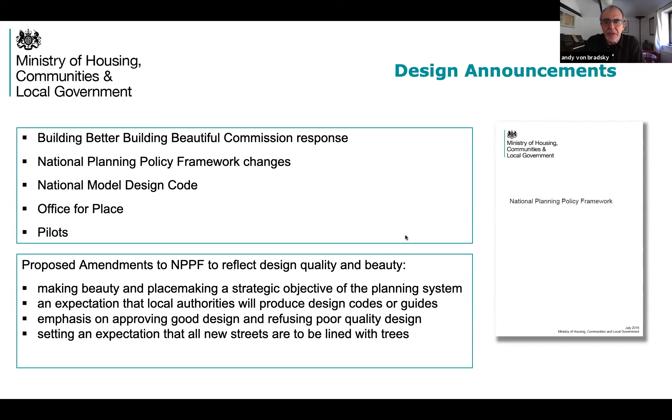So these are the documents that have been issued: firstly, a National Model Design Code, which we'll talk about, and in addition, the design guidance notes that go along with that.

I have to say, a fantastic collaboration with URBED and with Tibbalds on all of the products that we've now produced in government. It has been very iterative. We've talked across government departments and involved stakeholders right across the sector. So this is almost like a co-production as opposed to something we've just outsourced and expected external consultants to deliver. We had quite a considerable amount of overview and response to the consultation.

Design Council helped with that. We talked internally with PINS, with DEFRA, with DFT, BEIS, DFE, and the Home Office, so real engagement with other government departments. And as a consequence, we also talked to Natural England, Historic England, and the Highways England organisations. So some real interactions there.

So this is the suite of documents that now exists, and I think it's important to emphasise that this is not just about the National Model Design Code, although that's clearly a very important set of documents. It's about how all these documents read together. The work that Jane did on the National Design Guide is an anchor for the code and for the guidance notes, and I'll come on to talk about that in more detail. But it is now quite a significant suite of documents that can be referred to in planning decision making.

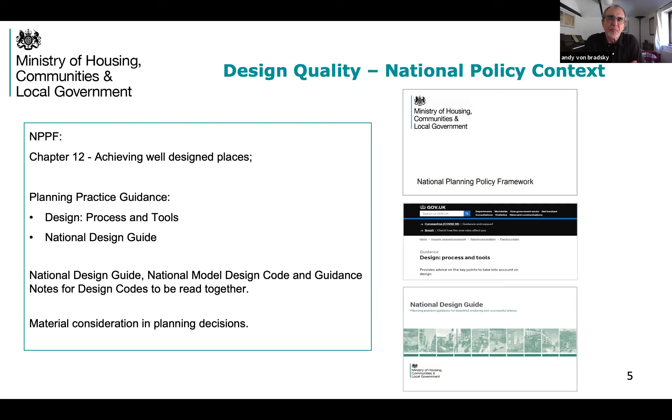Just going back on that point about interactions with other government departments, we took the opportunity here to try and embrace all of the guidance that is emerging or is being worked on or is out there, to make sure that the guidance notes pick up on relevant government initiatives.

You will know that Manual for Streets is being updated, commissioned for WSP, and they're currently working on that. I'm sure many of the members will be engaged in some of the workshops. I'd urge you to engage with that particular piece of work.

The Environment Bill and all its implications becomes quite a steer on the guidance notes, and green infrastructure standards, which I think will emerge in the months ahead, have also been incorporated in our thinking. And of course, climate change as far as we are able to go, and even to the extent of putting in a reference to modern methods of construction and how coding can actually help support that particular initiative.

So what is the code all about? We don't need to dwell too long on this because you will know very well how design guides and design codes differ, and how design codes can be used. And there's a whole raft of learning from overseas that we've gone through in deciding how to adapt that learning to our own circumstances.

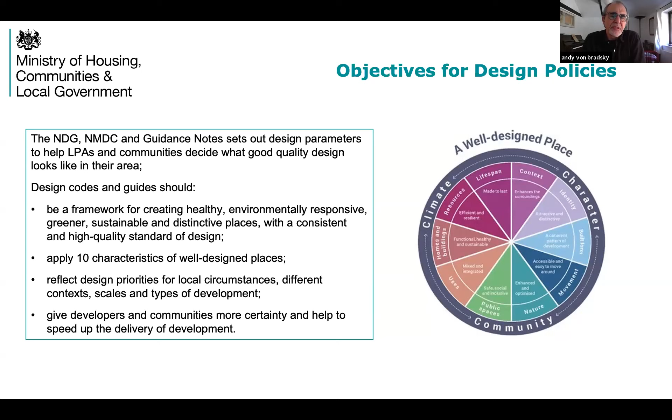Going back to the point about community engagement, a really important aspect from a government point of view is how do we bring democracy forward, a bit of a catchphrase at the moment, but a genuine attempt to get community engagement up front in local decision making on what is included in plans.

One of the key challenges is how do we measure support for design codes that then get embedded in the planning system. Not all the answers are there yet. We need to test that, and I'll come back to the piloting at the end to demonstrate that we are listening to how more community engagement might influence and shape local design codes.

And just finally from me, segueing into what David will talk about, the document isn't a code, it is a process. It needs to be applied flexibly according to local circumstances, and it needs to be informed by local vision, local understanding of the context in which you're operating. It could be ambitiously at county level, or at local authority level, and we'll talk about area.

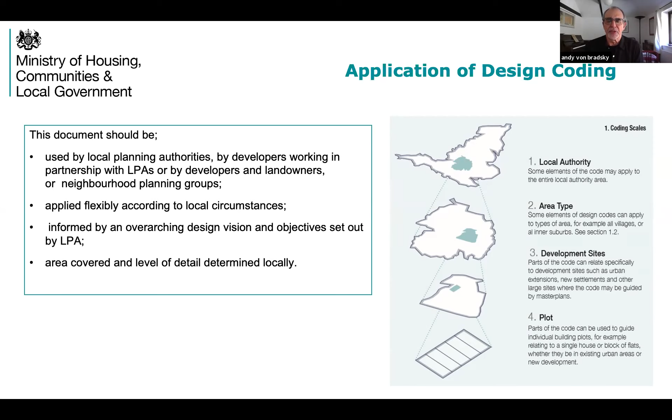Anyway, I want to just take you briefly through the process that's in the code. The guidance notes are far too big to really do credit to in the time we've got available, but the process is the thing that's innovative about the coding we've done. It's in 3 broad steps, broken down into 7 sub-steps, and I'll use my time to take you through those and how local authorities are likely to undertake the coding process.

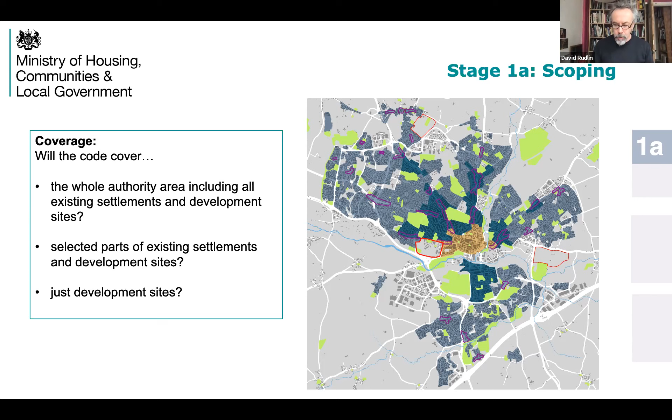So step 1 is analysis. The first part is a decision about the coverage of the code. Local authorities may wish codes to cover their entire area, but that's certainly not a requirement. It may well be they just decide to have codes for their new sites, the allocations, or for both new sites and some parts of their area. I suspect it'll focus on areas where change is likely. So the first question is how much of your district you wish the code to cover.

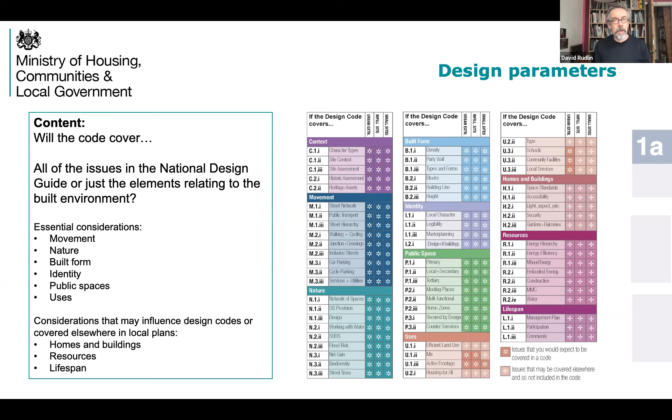The second question is what subject matter you wish it to cover. We expect most codes will cover movement, nature, built form, identity, public space and use. There are other issues we talk about in the code, particularly things like homes and buildings, quality standards, sustainability and management, which may not be in your code. That doesn't mean they're not important, it may well be they're included elsewhere in your policy agenda and not necessarily within the code. So deciding on what it covers.

The other part of stage 1A is, as Andy said, working out your consultation strategy. And importantly, potentially doing training for community groups so that you actually introduce them to the process of coding, so they know what to expect and how they can get involved.

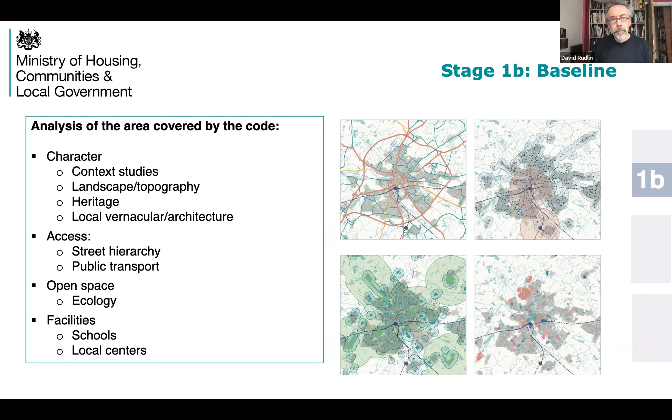The next part of the analysis, stage 1B, is looking at the analysis of the wider area. Most authorities can do this from their existing GIS systems, but things like the street hierarchy are crucial, as I'll come back to in a moment, in terms of how the code applies, but also where the schools are, the public transport, the open spaces, and so on.

We then move on to the vision, and as Andy said, the key thing that we've introduced in this process is what we call an area type.

Elsewhere it might be called a character area or a typology. Area type was the term we derived upon, which is unique to this particular document. Now these are areas of relatively homogeneous character, but the point about the area type and the design vision for it is that we're not so interested in what the character of it is now. We're more interested in the character as we wish it to be in the future.

So, for example, if you've got a suburban area that your local plan is seeking to intensify, the code would reflect that intensification. It would reflect the parameters of the area once it has been intensified. And the area types, therefore, are used to derive a set of guidance and rules, which then are area specific in terms of how they're applied.

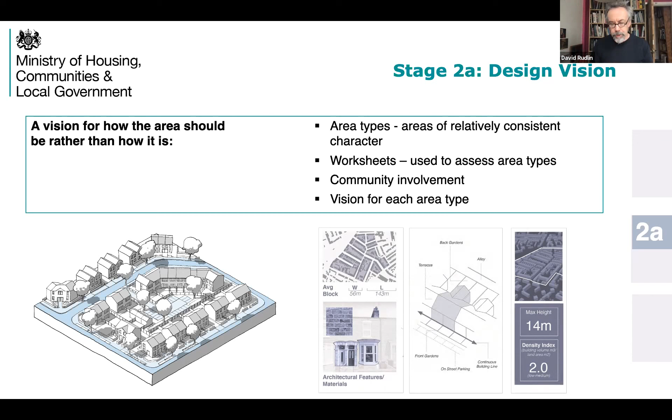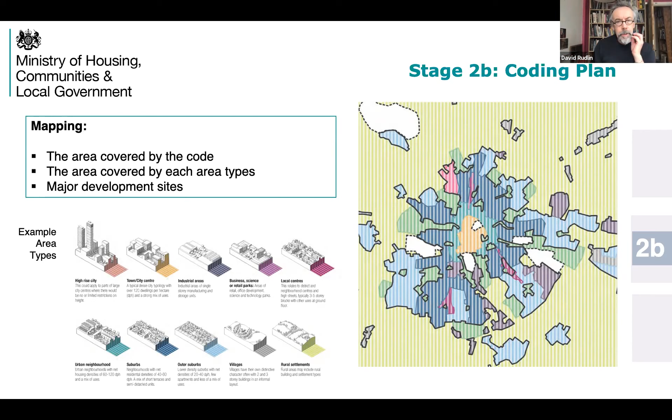Now, in order to code for these sites, you need to have a framework on which to hang the code. So stage 2C is the master planning stage. For each of these development sites, there will need to be a framework master plan, which at the very least shows the high streets and secondary streets, local centres, open space, and the area types. This is something which may be done by the landowner or the developer. That's perfectly fine, and then would be adopted by the local authority. It may be done in partnership, or it may be done by the local authority on sites where there isn't an active plan being developed. But clearly you need a plan which allows you then to apply the code to the sites.

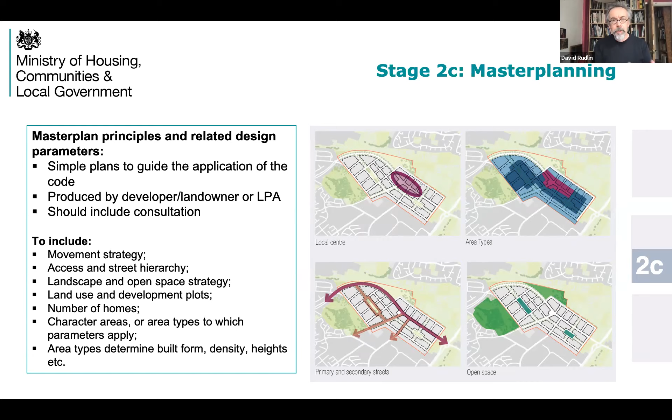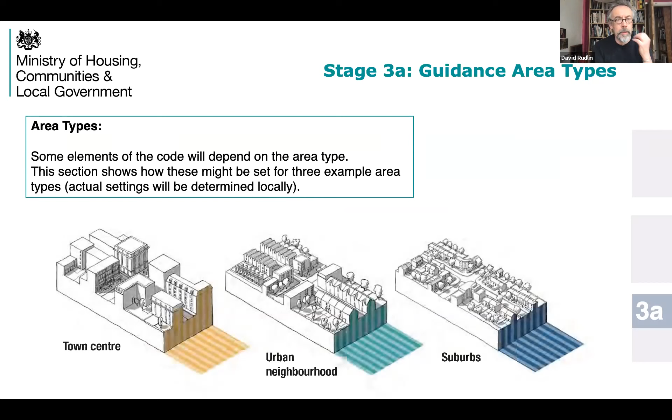So we can come to step 3, which is the code itself. And this is in 2 parts. The first part are the elements that apply to the area types. So about half of the code in total varies by area type. Things like building line, building height, active frontage, and so on. These are things which differ for different area types. In the guidance, we use 3 examples, again not intended to be exclusive: the town centre, the urban neighbourhood, and the suburb. We show in the guidance how the rules and guidance may differ by those area types.

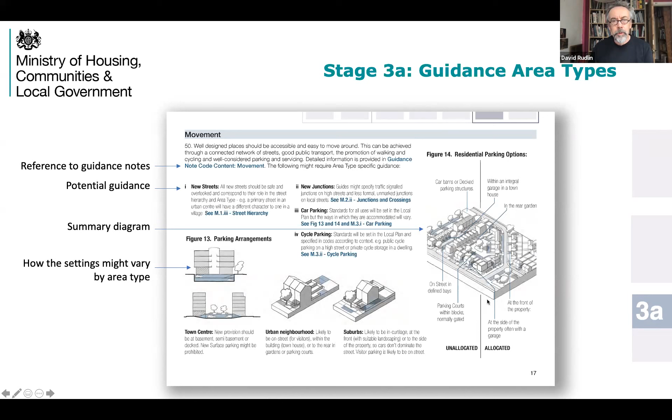So this is a typical page. You've got a paragraph at the top which summarises the issue. In the middle, you've then got a set of suggested policies that you might include in your code, each with a reference in blue, which refers to the guidance notes. And at the bottom, you've then got 3 illustrations showing town centre, urban neighbourhood, and suburb, and how you may apply those. Each has got a drawing, and we're thinking that local codes may just use these drawings if they wish to as well. And then there's a summary drawing, which then shows what happens when you pull all those issues together. So that's how the thing is structured.

We have a section on identity. It's something which is being keenly anticipated in certain parts of the built environment profession, to see how we've dealt with the issue of architectural character and design. We've done this in such a way that it's architecturally neutral. It doesn't indicate contemporary or traditional architecture at all. It's just about the principles of good building design, and working closely with Andy, we've tried to make this of the basic design principles of buildings which could apply to any type of architecture, and we do that for smaller buildings, but also for tall buildings as well.

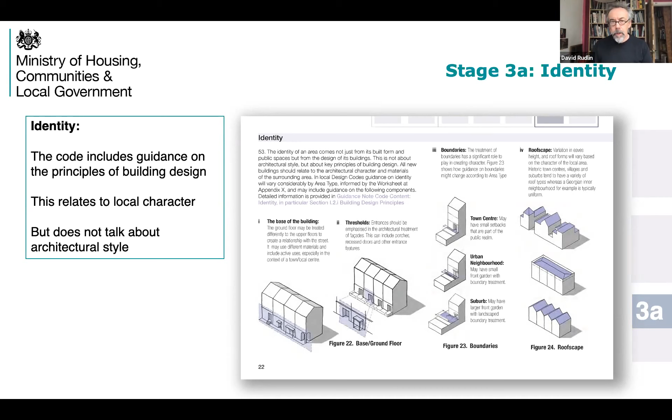Again, one of the issues we had with the code was not being able to be very specific on policies, because we're dealing with the whole country, and clearly there's huge variation in local circumstances. But we did want to put some examples of the way that coding would be specific. So these are some examples of specific coding.

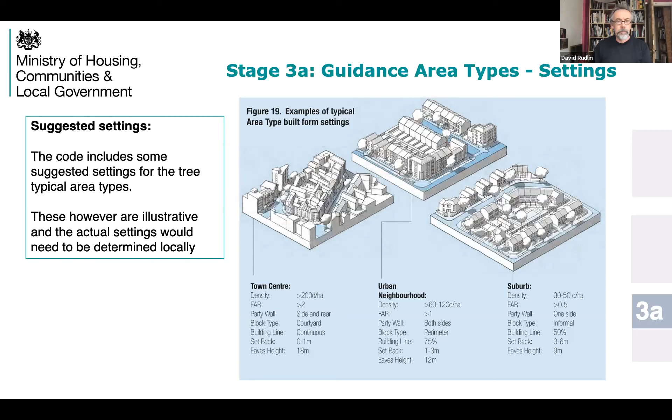So, figures for the density, for the floor area ratio, for the way that you code for party walls. The hope is that in local codes, this guidance would be clear, unambiguous, with yes/no answers—have you applied the code or have you not, rather than value-laden subjective judgments.

The code also includes quite a lot of work on streets. We were very aware that Manual for Streets was about to be prepared when we were doing this. It's now in preparation, so we don't trespass hugely into the highway engineering parts, but of course streets are about much more than highways—they're also to do with the buildings that enclose them and how those buildings relate to the streets.

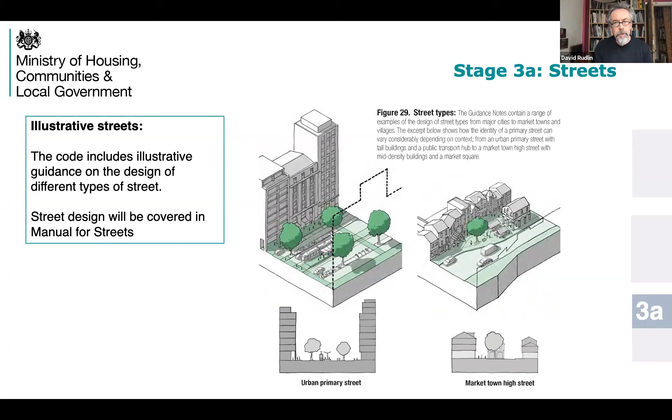We have a whole series of these sections in the code showing different types of street and how they may relate to the character of the area.

This comes into two matrices, which will be crucial to each local code. One is the matrix of streets—showing the street types down the left-hand side and the area types across the top. Clearly a high street in a town centre is going to be very different to a high street in a suburb.

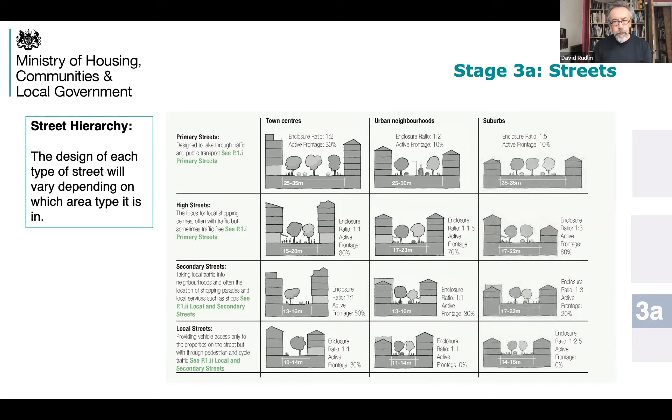The second matrix, which we haven't filled in because it would need a huge amount of local information, is to show all the policies that apply by area type, with the area types across the top. You go down, find the area type your site is in, read it down, and it tells you how each policy applies to your site.

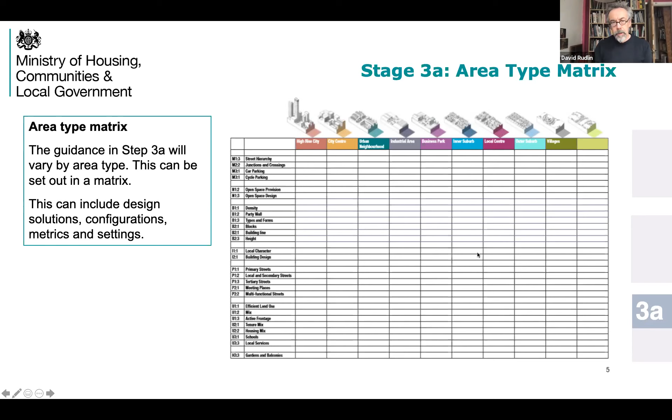That has code-wide guidance. There are things like the principle of separation of public and private space, which isn't specific to an area type—it applies everywhere. Likewise with things like sustainability.

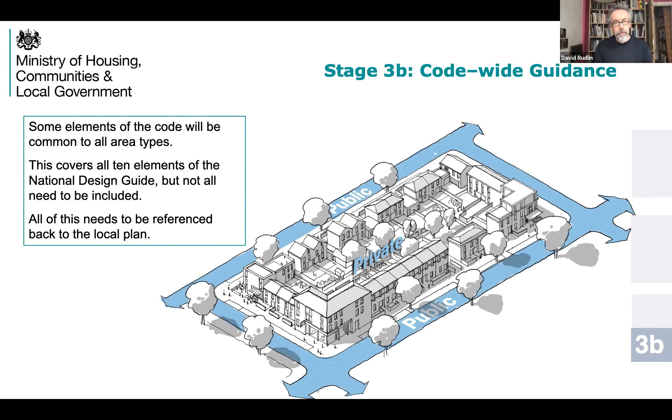This final part of the code talks about the areas applicable across all area types. This is an example of that code-wide guidance.

The guidance notes then back that up. Each section in the code, relating back to the National Design Guide that Jane produced, shows more detailed information on each issue, and it looks a bit like this.

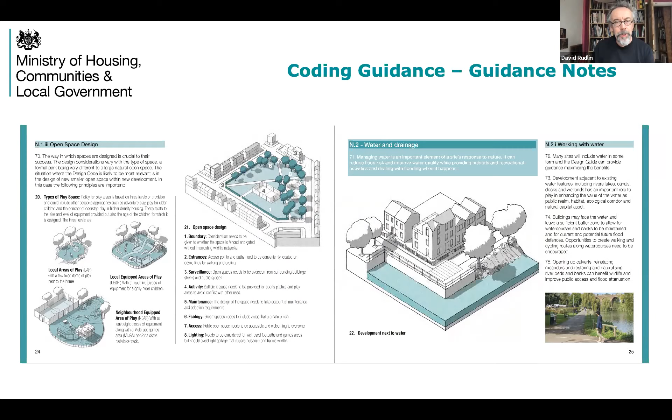Again, the brief was to make it as visual as possible with as few words as possible, which is something I struggled with, as Andy will tell you. The first version was twice the length of the one that's been published, but to make it simple, accessible, and as precise as we can be.

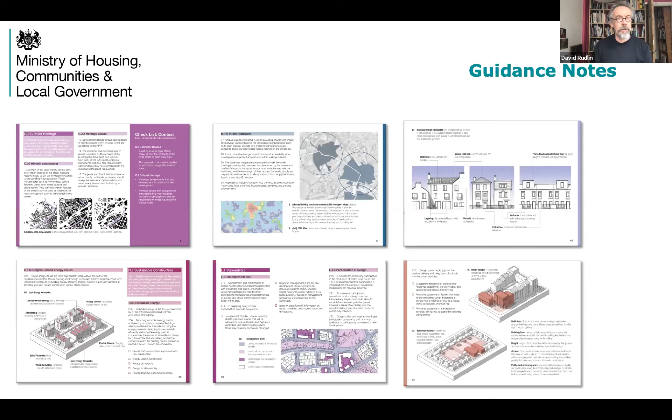So we have 10 area types, 10 sections in the guidance notes, which again look a lot like this. With that, I'm going to hand back to Andy to talk about the piloting program.

Thank you, David. Can you move on? So the first point to make is that the NPPF and the code are out for consultation until the end of March, as I mentioned before.

So do get your comments in. I'm expecting there will be comments on the code. I think we've got a very comprehensive package, but there might be comments on the way what we've designed applies in different circumstances.

We're aware there will be real differences in how this is applied, say in a central urban location, compared to how it might be applied in a county with rural settlements. So we've decided to run some pilots.

We're calling it a testing program because we don't necessarily expect to see a final design code out of it, but we do want to test what we've done in certain conditions. We've had a very healthy response to that.

If I'm coming across as a bit tired, it's because I'm wading through lots and lots of applications, and we have to decide on 10 that will go forward to test. We'll be doing that over the next couple of weeks, making an announcement, and then over a 6-month period testing the coding work in different contexts.